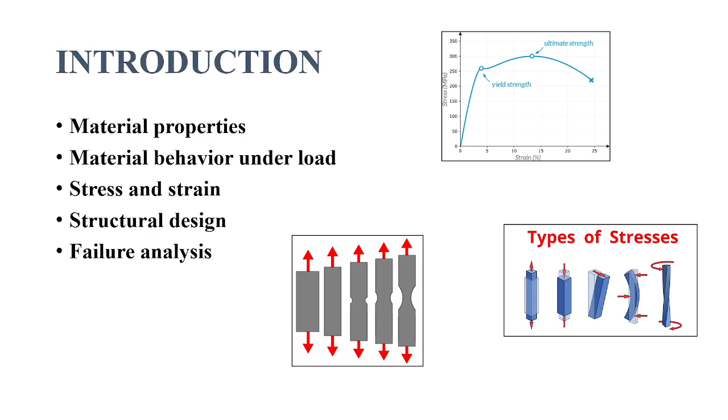The main principle of strength of materials is to ensure the design of a vast range of structural components. These components are like bridges, buildings, etc. Now let's dive into the topic. We are starting the topic called properties of the materials. Before knowing the properties of the materials, let's know what are the different types of materials we daily see in our surroundings.

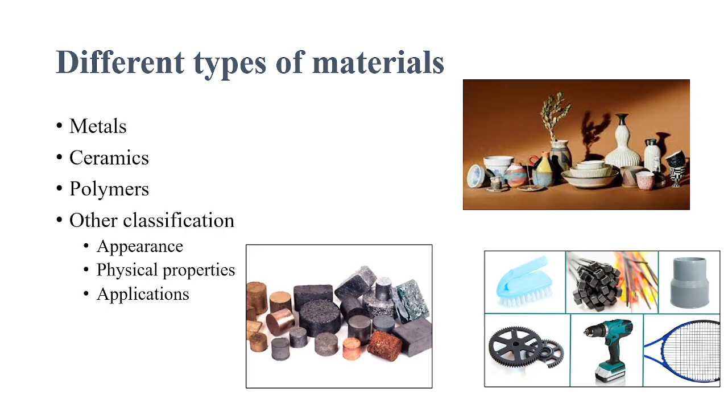There are materials like metals, ceramics, and polymers. Examples of metals are aluminum, silver, iron, gold, etc. And also ceramics, right? We can see these ceramic materials in kitchens like utensils, and also polymers, which are part of our daily life. These materials are classified based on their appearance, physical properties, and their applications also. Now let us know how these materials are classified based on appearance.

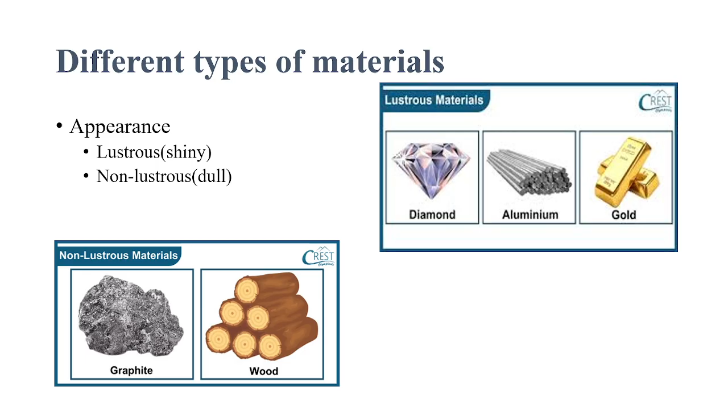First, there are lustrous and non-lustrous materials. Lustrous materials are those which give a shiny look when they are cut. For example, diamond, aluminum, gold and silver. Mostly metallic elements are lustrous in nature. Non-metallic materials like polymers and ceramics may give a dull surface when they are cut. For example, wood, graphite, and the polymers also give a non-lustrous appearance.

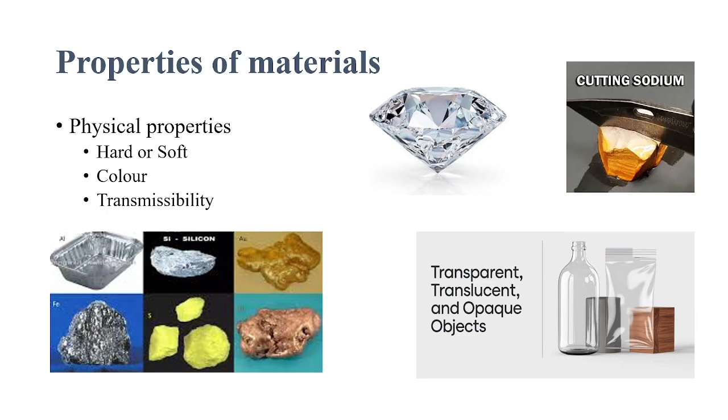And after completion of the physical properties, now let's dive into the mechanical properties of the materials. First one is the strength. Mechanical properties are those properties that are tested in the lab so that we can know how the material is resisting with respect to the changes that are done to it. These are not based on the physical appearance, but these are based on the tests we have done.

First one is the strength. Strength is the ability to withstand applied force without failure. If we apply any force on the material, then there will be some internal forces that are developed against this external load applied. If the external force increases, after some time these internal forces will stop, and there we can see the deformation. The maximum external force we can apply so that the structure withstands it without failure, that is called the strength.

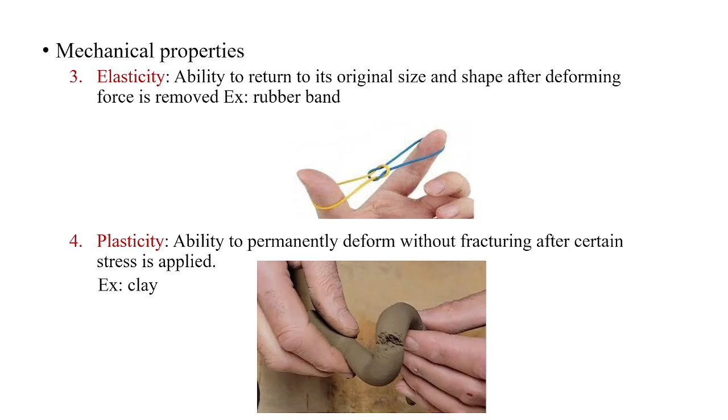For example, ductility of copper is very high, so that copper can be made into thin wires which are used in our electrical appliances, electrical circuits, because of this ductility property.

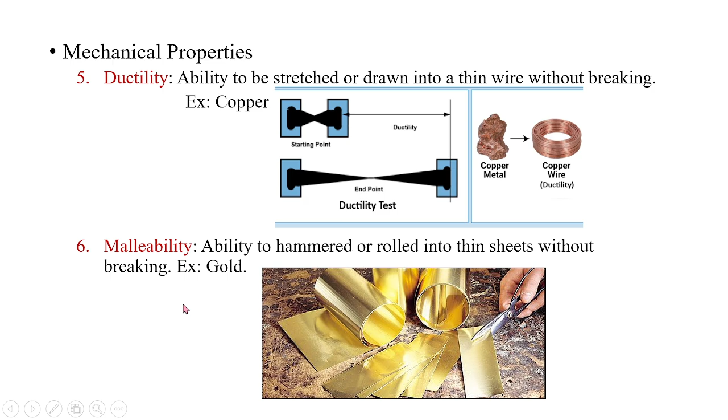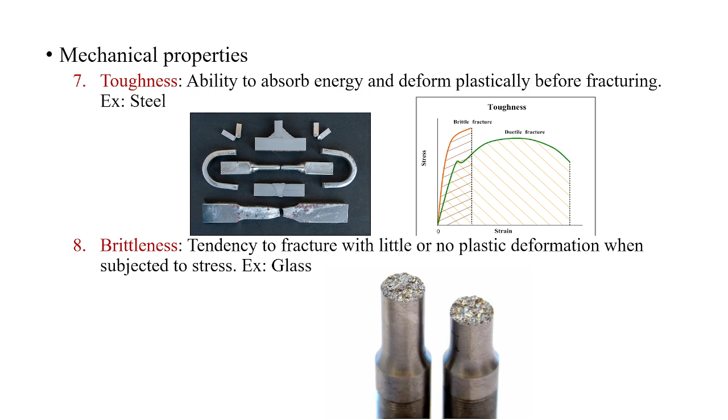Example, if we consider a glass, when we hit a glass, it will not strain anywhere. It directly breaks or shatters into pieces. This is the main example of brittle material. And also if we consider cast iron, when the maximum point of failure reaches, it directly fails without giving any plastic deformation or without any warnings. So in the design of structures, we mainly use the ductile materials like steel. So these are the different types of properties of the materials.